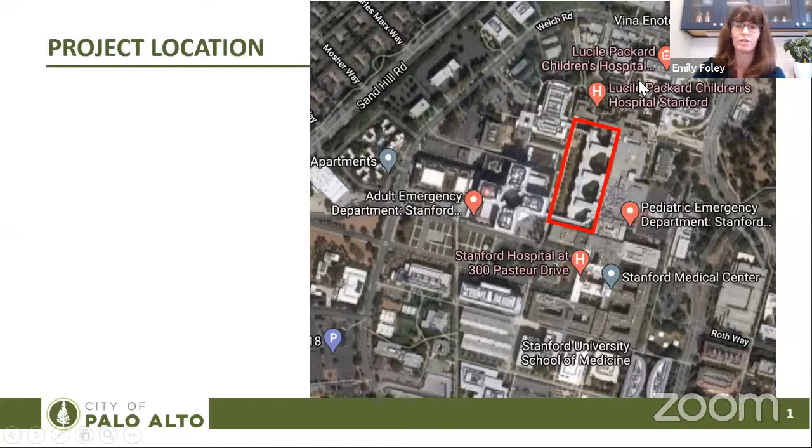As a general overview of the Stanford University Medical Center project, in 2011 the overall renewal and expansion project was approved. This included the Stanford Hospital built over the last couple of years, which has been more or less completed, the expansion of the Children's Hospital, new School of Medicine buildings, one of which has been built, updates to the Hoover Pavilion site north of the main site, as well as new parking facilities and road improvements. A current application also being reviewed is for a road extension that was part of the original project entitlement.

The project we are looking at today is not part of this original entitlement, which is why it is an architectural review board level project. In terms of the overall site, there's 3.6 million square feet of building allowed, and this project would require the site to temporarily be over this. However, this is allowed under the CUP. It would start a 3-year conditional period to reconcile the floor area between the newly built area and parts that are proposed to be demolished as part of the original entitlement project.

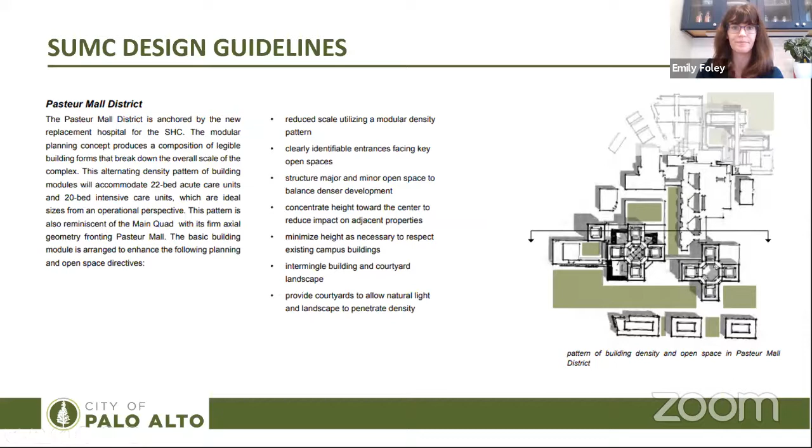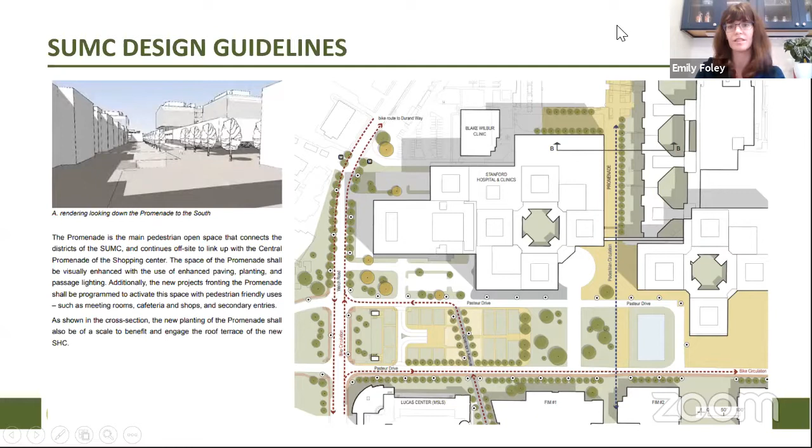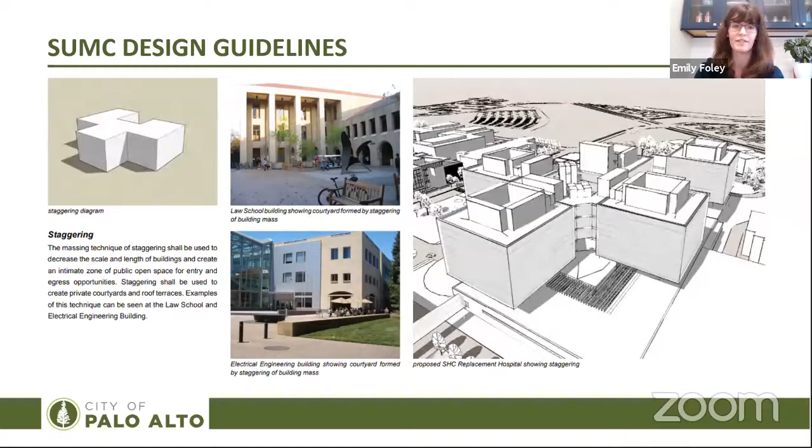Staggering is also an important massing technique in the guidelines, to have the buildings offset and have the in-between areas used for landscaping and open space.

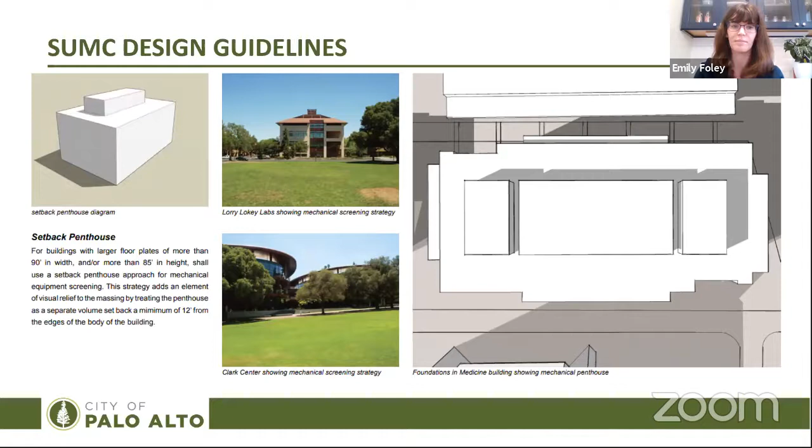Another technique is to have equipment penthouses set back from the edge of the building to reduce visibility.

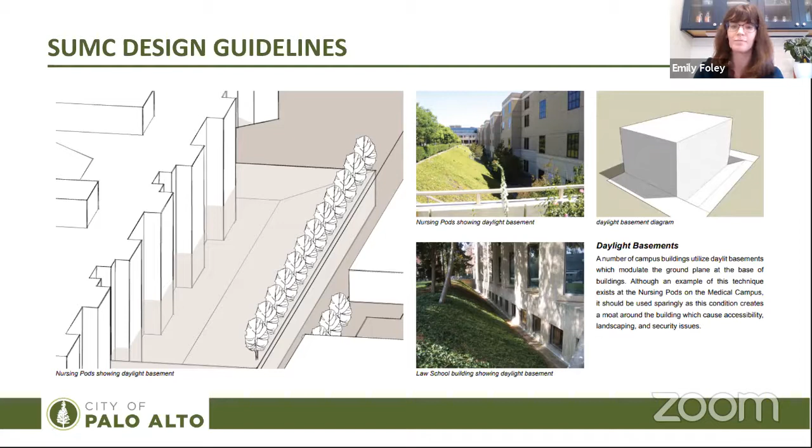This guideline also talks a little bit more about the importance of courtyard and in-between landscape areas.

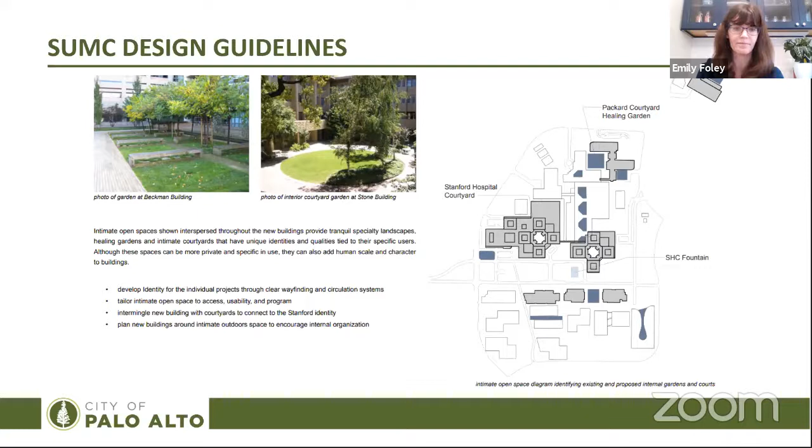The design guidelines also include a palette of materials and colors. One important aspect of this is dividing the materials of a building into primary, secondary, and accent categories.

However, there are many buildings throughout the medical campus, and while they need to work together, they are not necessarily all the same materials and colors.

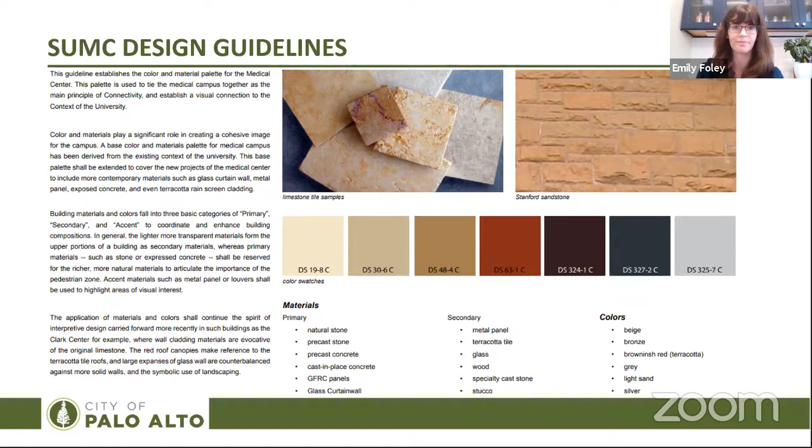Looking at the nursing pod expansion project, the proposal is to add 38,000 square feet to the existing 134,029 square foot building. This new addition would have a 71 bed capacity, which includes some new beds under the total 600 bed limit for the hospital, as well as relocating some beds from older portions of the hospital.

The proposed height is 4 stories, which matches the existing nursing pod building, and one of these is the below grade daylight basement level.

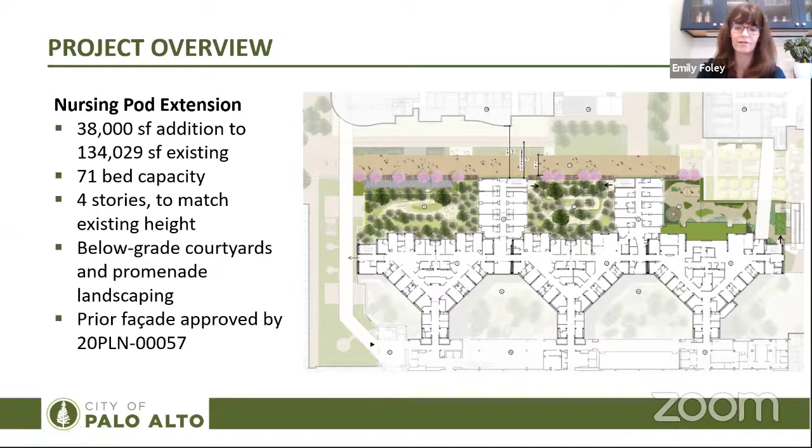There's below grade courtyards, and that would be modified as a part of this project, as well as landscaping modifications to the promenade. The exterior of the building would be matching facade changes that were approved in a staff level architectural review for the main nursing pod building last year. However, work on this project has not started yet.

The top image shows what the existing nursing pod building elevation looks like, and the below shows the additions that will protrude to the front towards the promenade, as well as the facade change that was previously approved.

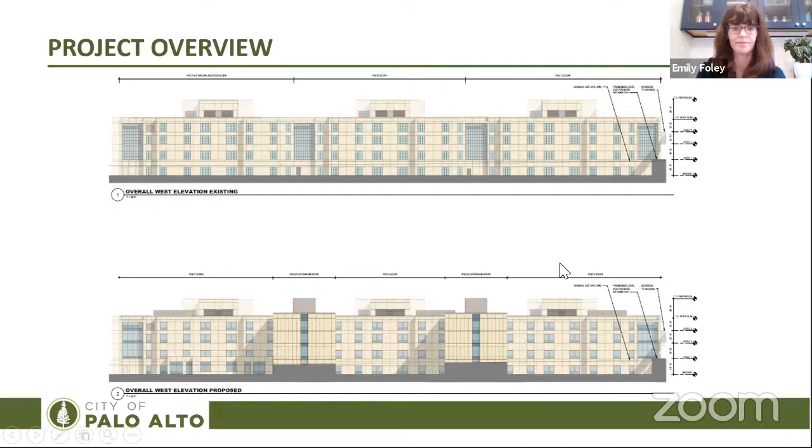This shows side elevations, as well as the promenade between the nursing pod building and the main Stanford Hospital building, which is this side.

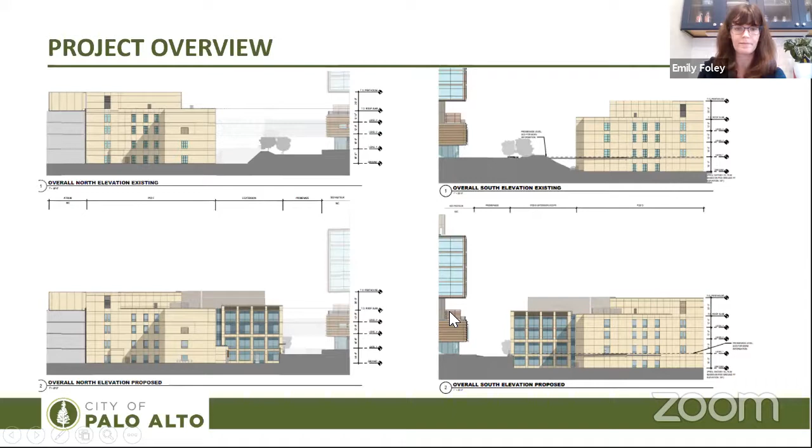This image shows the 3 courtyards. Currently, there is no access from the promenade to the courtyards. This design would add gates and paths for maintenance in the 2 courtyards on this side.

The 3rd courtyard to the right is more unique. It would have recreational facilities for the psychiatric ward of the hospital, and there are certain requirements that go along with that.

Overall, the particular plantings would be looked at more so in the formal application phase.

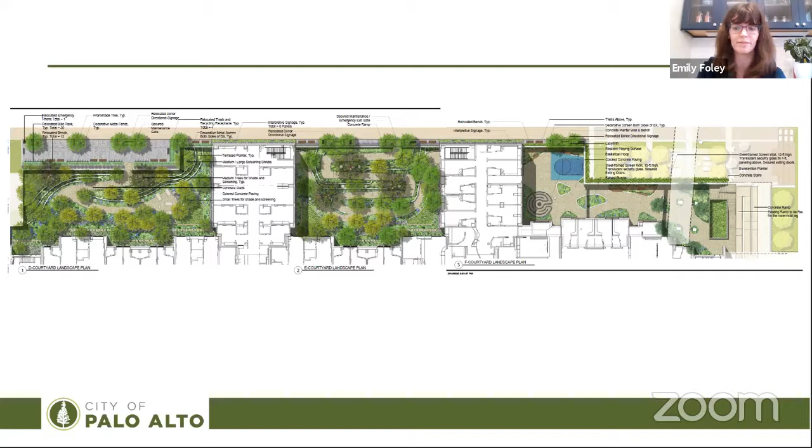The key input that we're looking for from the ARB today is on the overall size, form, massing, and scale; the integration along the promenade and throughout the site; the materials; the design of the gathering spaces, including the promenade and the courtyard; and the overall access, as well as the height and character of the proposed fencing and elements along the promenade. This concludes my presentation, and the applicant has a presentation as well.

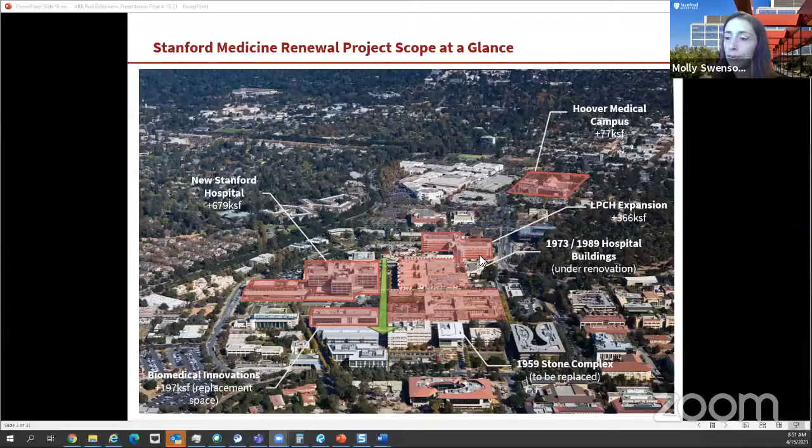Now zooming in and looking at the Promenade and our proposed project in more detail, the two extensions to the nursing pods shown here would add a total of 58 net new inpatient beds, which would enable the relocation of the remaining beds from the 1959 facilities, all within a minimal building footprint.

As this proposal was developed, we relied on the medical center design guidelines approved by the ARB in 2011 to guide our decision-making. With the project's proximity to the Promenade, we felt that this presented an opportunity to really think about the types of public spaces we were creating along this key thoroughfare, and to even allow it to become a destination in itself.

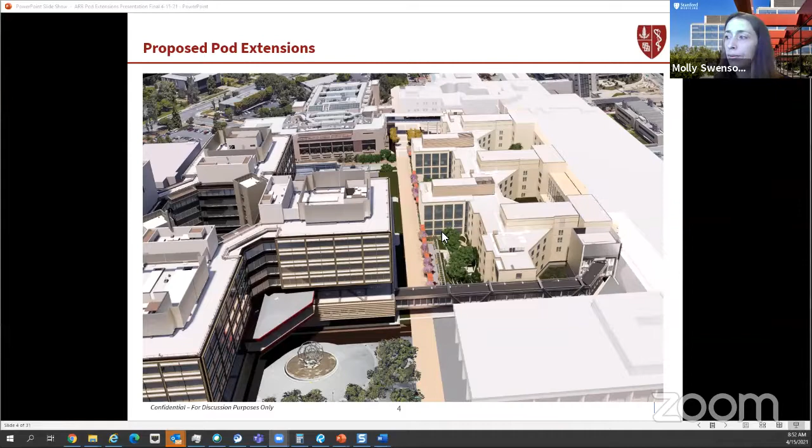Thinking about the levels of activity along the Promenade, it was our goal to build upon existing nodes of activity and really reinforce the nodes at either end of the Promenade, and allow the middle segment to become more of an opportunity for relaxation and respite.

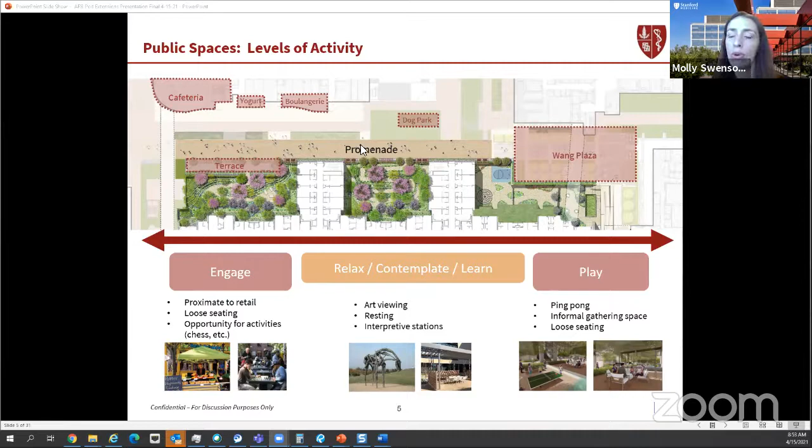With that in mind, our project would create a new outdoor seating area at the southern end of the Promenade, proximate to retail, food and beverage service at the adult hospital, as well as the adult hospital entry plaza. The middle segment would offer amenities geared toward more quiet activity.

Thinking about some of the specific programming opportunities for the terrace area at the southern end of the Promenade, some of the possibilities we're considering include health screenings, farmers markets, temporary interactive art installations, healthy cooking demonstrations, just to name a few. Then for the middle segment of the Promenade, we're planning for interpretive panels that would speak to the history of Stanford medicine and offer an educational opportunity as one walks along.

We're also planning for bench seating amongst plantings and beneath trellises, giving an opportunity for quiet contemplation. And finally, at the northern end of the Promenade, in the space known as Wang Plaza, as part of a separate scope, we're planning for ping pong tables and eventually a mobile library cart.

With this background context, I'd now like to hand it over to Pam Kurz with Perkins Eastman, who can speak to the building design. Thanks, Molly. I'm Pam Kurz, principal at Perkins Eastman, and lead on this design effort.

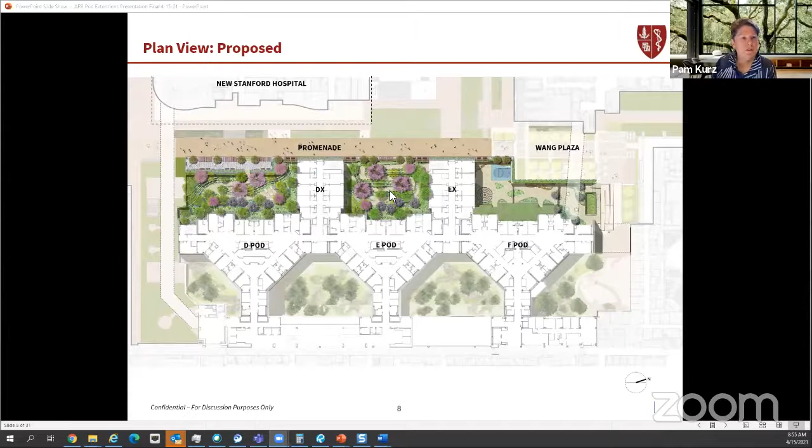Turning to our proposed plan, for orientation purposes, north is roughly to the right. At the top, we have the new adult hospital, the Promenade, the bridge connection to the pre-existing hospital, the 1989 nursing pods known as D, E, and F pods, the proposed extensions DX and EX, two view gardens, and a courtyard for psychiatric inpatients.

Looking at the west elevation, you see that the massing follows the staggering technique identified in the medical center design guidelines. We took special care to make sure there wasn't an alignment with the extensions and the new adult hospital, and the scale is in keeping with the existing hospital buildings.

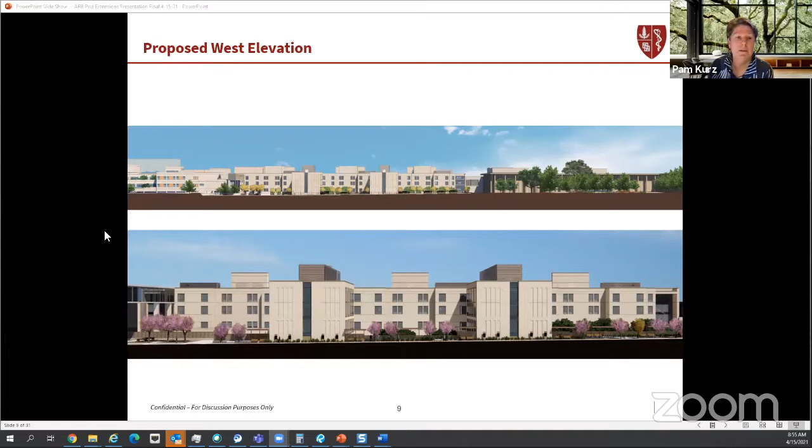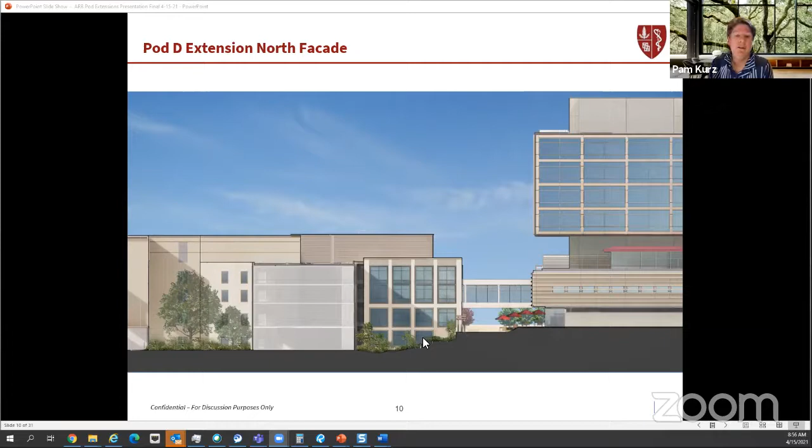Here you can see the relationship to the new adult hospital with similar window module and articulation, but scaled down to the pods. The north and south facades are both glazed, providing a connection for patients and families to the garden spaces. The view gardens terrace down one level from the promenade.

In terms of material selection, we have again taken direction from the medical center design guidelines, including a neutral beige color palette for the high performance concrete panels and replacement stucco at the existing pods. Shadow boxes at the patient windows use horizontal fritted glass, drawing on the language of the window baffles at the new adult hospital, but appropriately scaled down.

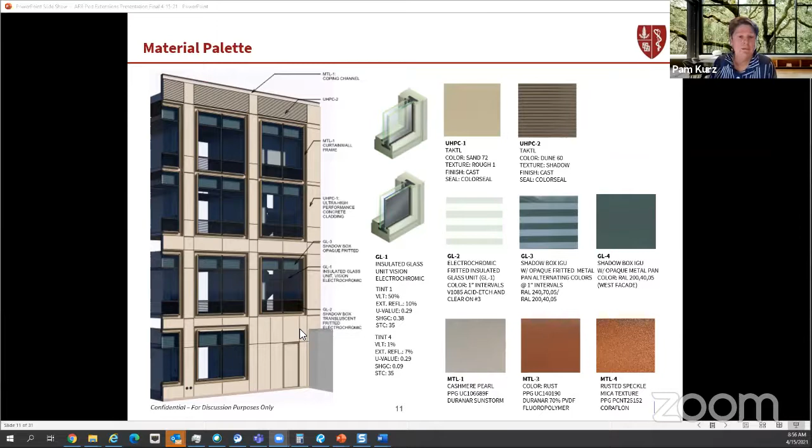Our design effort has given great focus to the promenade at the pedestrian level, where the pods and extensions serve as a backdrop. Simple canted TAKTL panels provide subtle visual interest with shifting shadow lines throughout the day, and trellises provide human scale. With that, we'll move on to views as experienced at the pedestrian level.

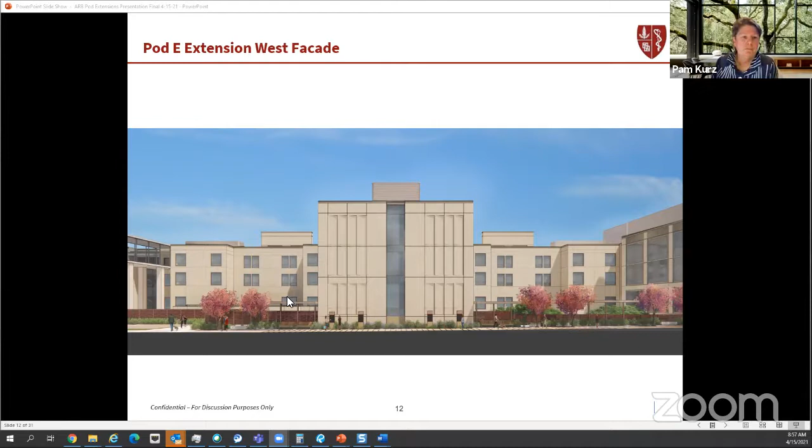A view from the southern end of the promenade, with the new terrace area on the right with loose seating. You can see the rhythm of the trees and trellis elements and large garden spaces between the new extensions. The trellises pick up the accent color used in the soffits at the new adult hospital, reinforce the pedestrian focus, and reduce perceived building mass.

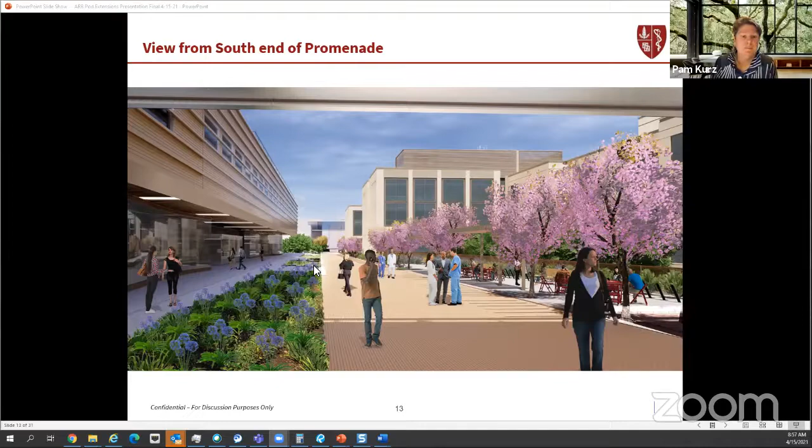I'd now like to turn it over to Adit Paul, who will provide more detail about the landscape design.

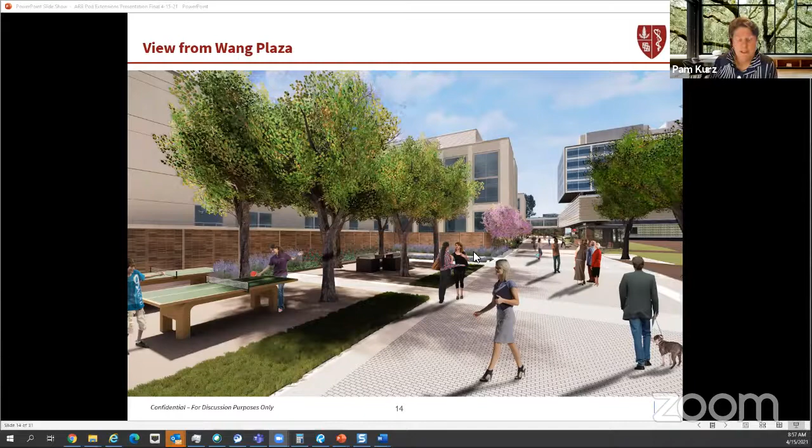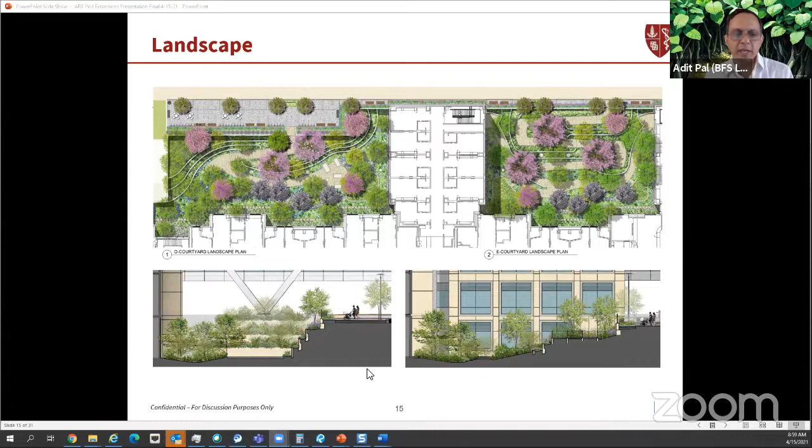The F courtyard is a carefully programmed outdoor space for psychiatric patients, approximately 4,500 square feet in area, with activity areas and garden plantings. This is actually a regulatory requirement for the psych facility that is being relocated from the main hospital.

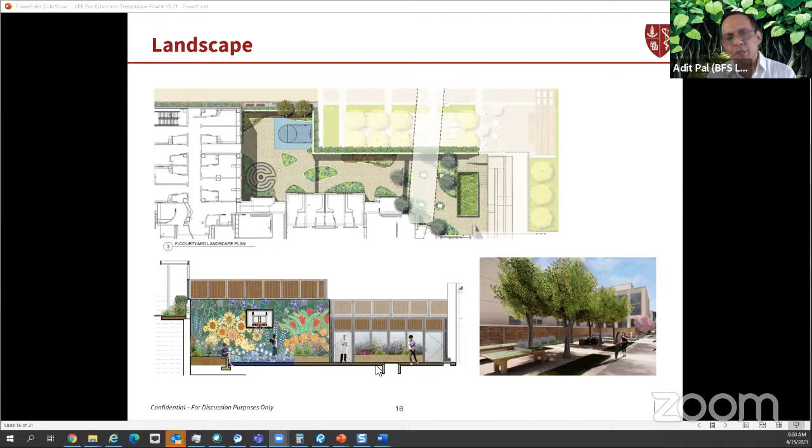The plantings at the D and E courtyards consist of a 2-layered approach. The layer closer to the windows will have heavily flowering garden plants that can be seen all around Palo Alto to bring comfort to patients.

And this is balanced by a textured yet seasonally flowering landscape back further in the middle of the courtyard. This large variety of flowering really supports the habitat creation goals of the city urban forestry master plan.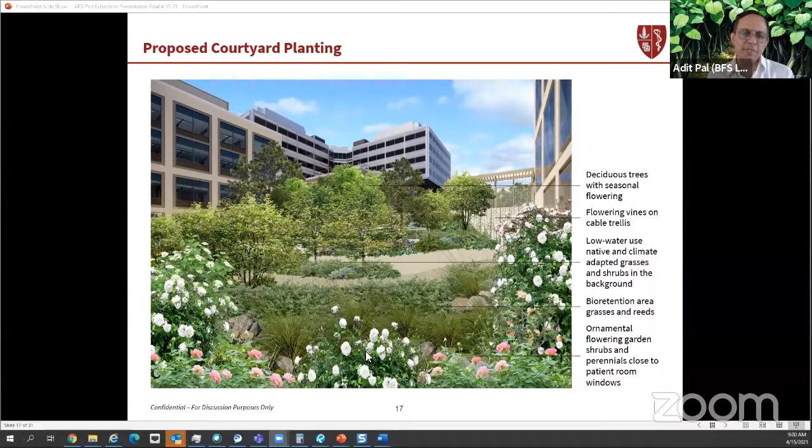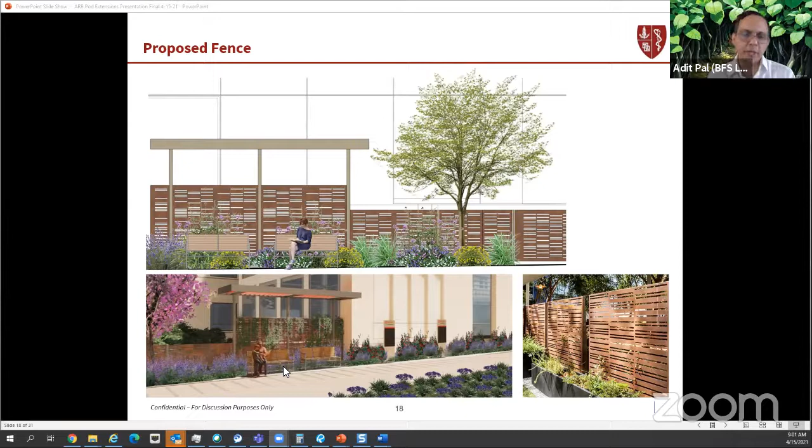The end walls that are kind of blank with the canted panels, I think still could probably use more work. I think I appreciate the effort for the interpretive panels and the canted panels. I think that helps. But I think maybe there may be ways to make it even more pedestrian friendly.

On the materials, I think that those are all acceptable. I think we've only had one other project in Palo Alto propose the tactile panels before, and it hasn't been built yet. I think it's still under construction. But I think that from what I've seen, it really has more depth than any other option on the market.

So I think that those are acceptable. I did look at the plant list, and I think that looks good. I do like the designs of the individual courtyards. I am not crazy about the fence on the north end, but I think I understand why it's there. I kind of like the idea of the slatted metal panels there, because in a way it kind of ties to the Edward Durell Stone panels, with the screens. So I think that's okay.

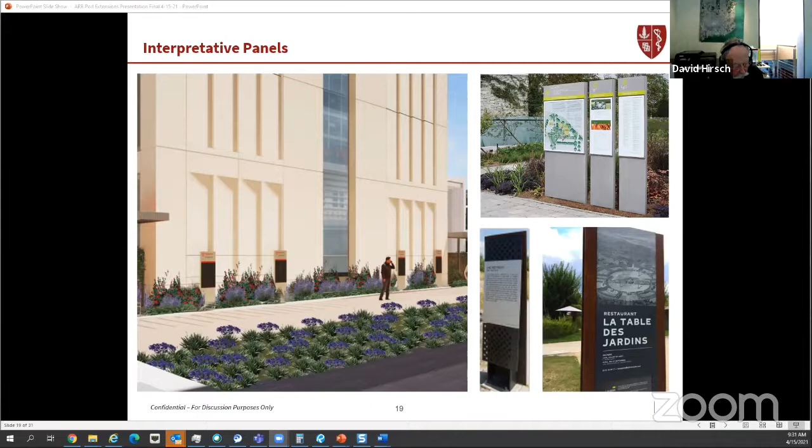So I think as part of the formal application, we'd be able to see a little bit more detail about the equipment going in there, correct? So we'd have a better understanding of why that height is needed. Right, and probably also a better understanding of what the screen itself is. Yes.

Any other comments from board members? Nope. And any other questions from the applicant on our review? No, thanks for all of your comments today. Thanks.

Sorry, I had one last comment on the panels. I think as you guys are developing these, panels have a tendency to look like junk on a facade when they're filled with a lot of information. What's really successful about a good information panel is how it brings out what's important. I know board member Hirsch liked the one above, which has a clean look with an evenness to the lines on the panels - that's something kind of successful. But I'd also encourage, and I think you guys are already starting this, that the coloring of what goes to the background and what comes to the front is key here. Maybe it could integrate art or something to create a bit more of a 3D feel than the 2D option. Okay, that's my note.

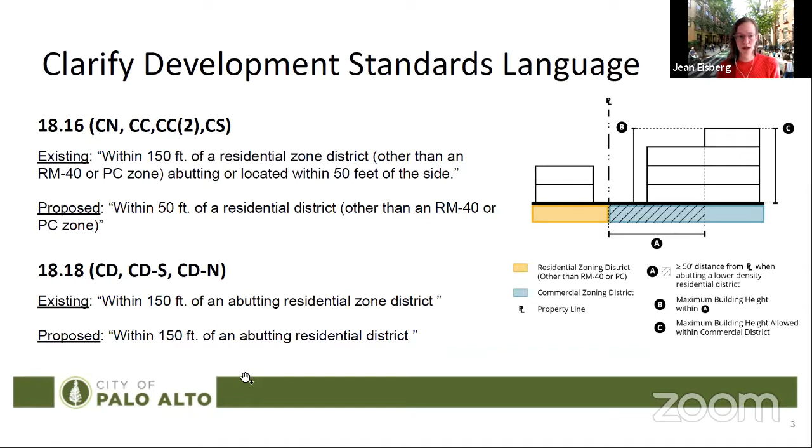In the At Places memo, there are text edits proposed as part of the Objective Standards project, where we were working with you on design standards. We also, as you recall, have another series of changes to other parts of Title 18, and this is the language proposed as part of those other changes.

So this looks a little less scary as a table. It's just generally more consistent across each of the districts. But again, we're not trying to make substantive changes at this time.

So the performance standards, when you're within 150 feet of these lower density districts, apply relating to visual screening, noise, parking, glare from potential lighting, air quality, hazardous materials, etc.

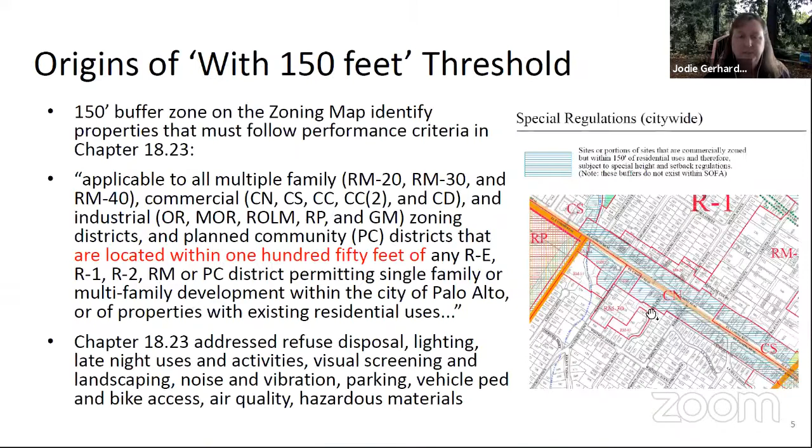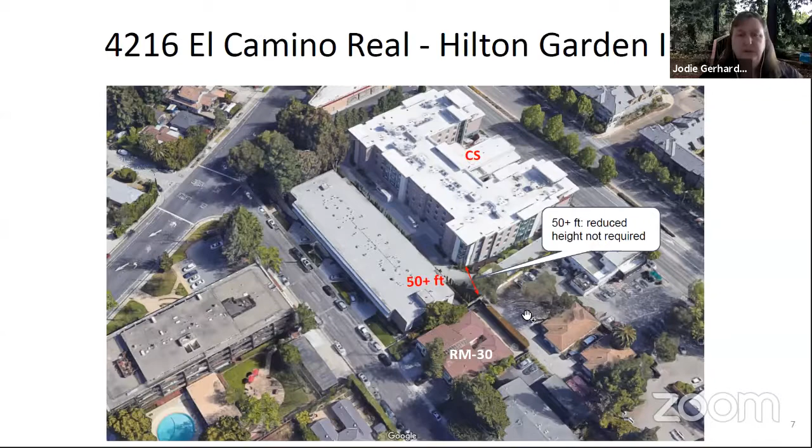Maybe Jean, if you show that slide back, the graphic for the measurement. Thank you. Wilton Court—that looks like it's going to the building, but I see now it's going to a fence, which is probably on top of the property line. Yeah, and you can see it on Wilton Court as well—it's from the RM30 property line to the Wilton Court building.

Okay, if you stay on the slide, can I ask one more question? Sorry I'm taking so much time. But if that wasn't RM30, it might have been 150, right? No, if it was downtown, it would have been 150. Right, so this situation downtown would have been 150 feet. Correct, currently. Okay, thank you.

Actually, Grace, on Wilton Court, this one is under the affordable housing overlay. Okay, so might that supersede? It has 50 feet, but if it were not affordable housing, it would be 150 feet. Okay, thank you.

So, the affordable housing, I'm sorry, workforce housing, has the same sort of confusing language as the commercial zones. Affordable housing does say within 50 feet, but it also gives the director a little bit of latitude. So this Wilton Court is actually like 46 feet, but it's sort of a good representation of what would happen in a standard commercial zone.

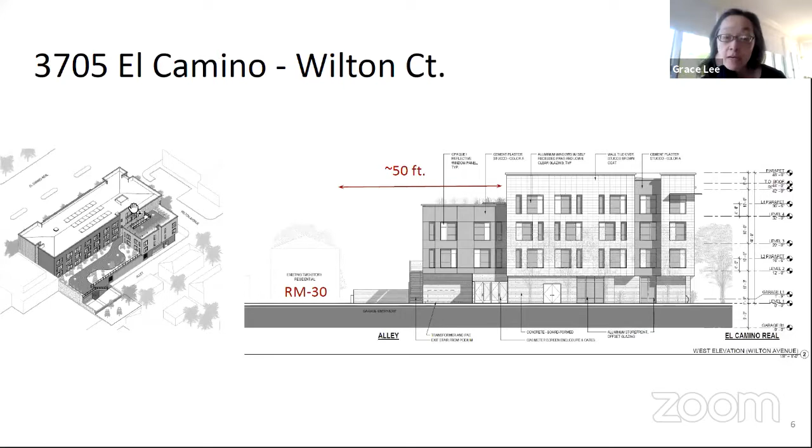Okay, and then I guess for Jean or for all of you, this is something when you say you want us to discuss these future housing discussions, this is something that will be posed to the housing element group, right? That was newly formed. I assume you're going to be bringing this exactly to them. That is correct.

Okay, well, should we go question by question, or maybe just the bigger topics? If we could start with just the objective standards project for today, the specific language, maybe we can do a round of that and then a round for the future discussion. Okay, sounds good, let's do that. Who'd like to start?

I'm happy to support what staff is doing. I think it makes a lot of sense to bring everything to the 50-foot distance as Jodie has done. So my answer to the first part is yes, I support that strongly.

Thanks. Board Member Hirsch? I agree with Mr. Baltay that the 50 feet seems very reasonable to me, especially looking at Wilton Court and seeing the way the massing is done. It seems an appropriate dimension, and the restriction involved there seems to be working very well with that particular planning and zoning, in that program, and should work in all others as well.

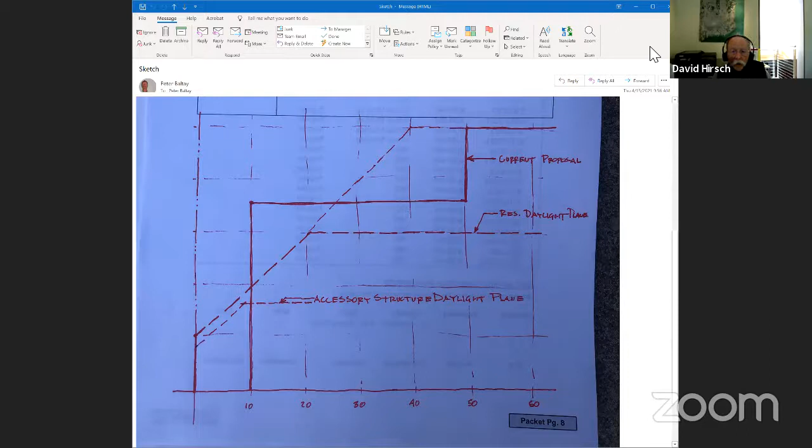I think this diagram really shows it to me. If it could be more a selection that cleans up this text - it seems to me the 50-foot works within this diagram, or to use the daylight plane, one or the other would be effective. So I would go along with the staff's recommendation here, but also I think a daylight plane would be equally successful.

Sorry, I was going to give Board Member Lew a chance. Oh, I'm sorry, okay, go ahead. Yeah.

Alex? Yeah, I don't think I have anything to say on the daylight plane, other than in many places we have the zero setback allowed. Like for example, in the CS zone, you can build right at the property line. And so that seems to be problematic in some cases.

And then I'm collecting my thoughts on the more general housing issue, so I'll come back later.

Okay, Board Member Baltay? Yeah, well, Alex is correct - you have zero setback in the CS zone, except when you're next to a residential property where you have 10 feet. And yeah, I'm starting to coalesce - there's only low density. Go ahead, Alex. That's not for - see, there's multifamily and then there's R1, and I think it only applies to the very lowest.

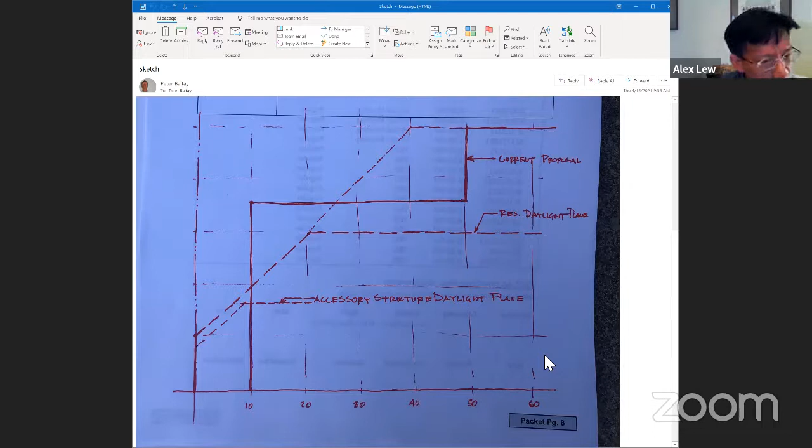Like R1, RMD. It's not been my experience, Alex. I'm working on a project downtown, we had 10-foot requirements point blank in the CC zone. But yeah, there's a 10-foot setback in the performance standards. There's a 10-foot rear setback abutting residential zones. This is for a mixed use or residential project in the commercial zones. And residential zones would be all the different residential zones up to RM40.

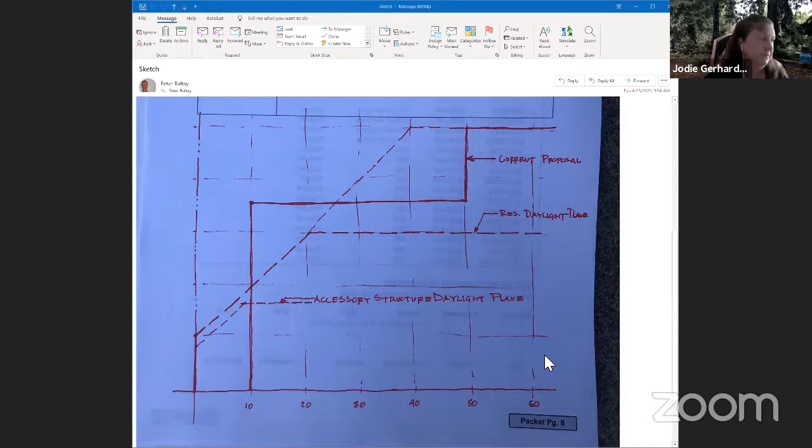Interesting, okay, thanks. But my thought is more that I think a combination of yard control, setbacks, and a daylight plane is probably a better, less restrictive way of achieving the same overriding objective, which is to preserve a sense of light and air and achieve more privacy.

Osma, to your point, I think if I were designing, I'd much prefer to have a daylight plane, which gives me a lot more flexibility to go a little bit higher if I step forward or backward. As a designer, I appreciate having the ability to decide for myself. Just being told 35 feet until I get 50 feet away is a pretty strong requirement. And I think a greater design flexibility, more subjectivity comes from a daylight plane. Never thought about it that much before, but I think that's how I feel that way anyway.

So I guess I'd like to, I don't know if recommend or anything, but it seems to me that a daylight plane is worth more consideration. Ultimately, Alex is correct - these are big issues that council, planning commission, and other boards and bodies need to think about. But if you want architectural advice, to me, this diagram says what I think.

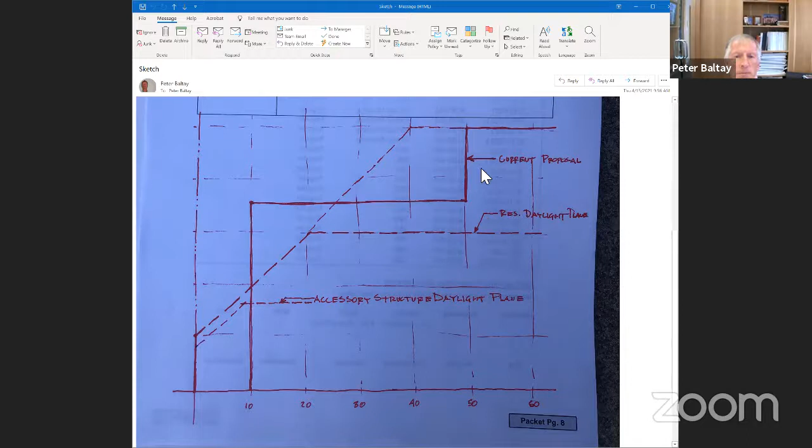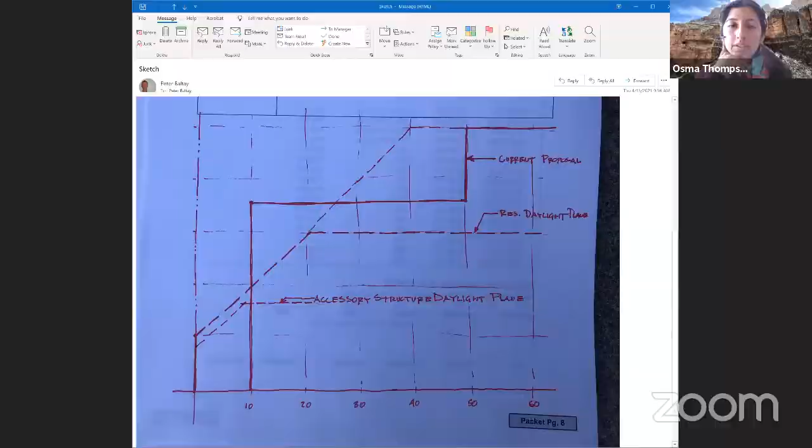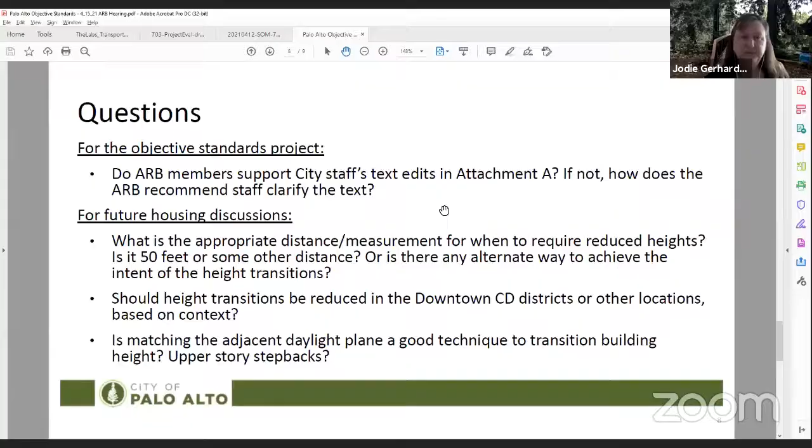Okay, thanks. Why don't we go back to the questions on the greater discussion? If you're able to stop share. Jean, are you able to bring that up? I just want to give the board a chance to discuss some of these questions here on the appropriate distance and the height transitions in downtown. So I think I heard that Vice Chair Lee and Board Member Lew were wanting to speak to these. So we'll start with Vice Chair Lee.

Thank you, Osma and staff, for posing the questions. I had a couple of thoughts, and I also wanted to engage Alex on the question, since I think Alex had mentioned some specific districts within Palo Alto and more of a gradual or layered way of looking at this for a future housing discussion. I wanted to pick that up to understand it better.

For me, when I look at these three questions, I think they're very important to ask. Largely, my impression from working on architectural review is that I generally question the height transition requirements where a proposal might not be fulfilling the exact standard in the table, but still seems to balance needs and provide compatibility and desirability.

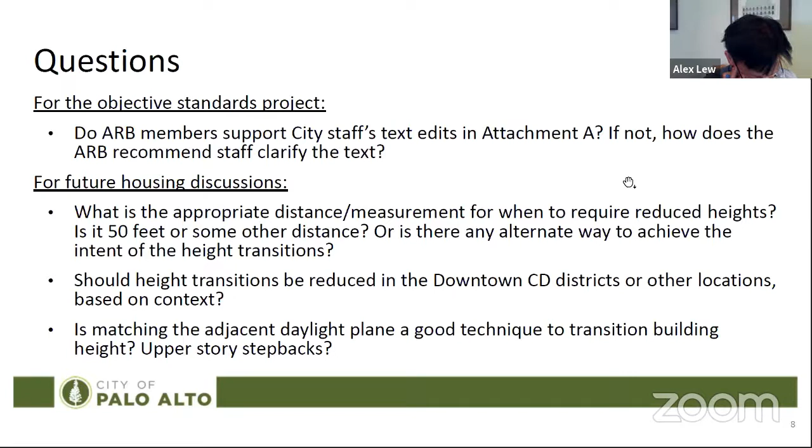On an alley off of Bryant Street, and it's historic. And because it's there, the zoning map draws a 150 feet circle all around it. So it's basically down-zoning like half of the city block for one historic house. Something like that really should bear some scrutiny. There must be a way to allow a historic house to have some sun without impacting half of the city block. So I think we should consider reducing it in the downtown area. That's it.

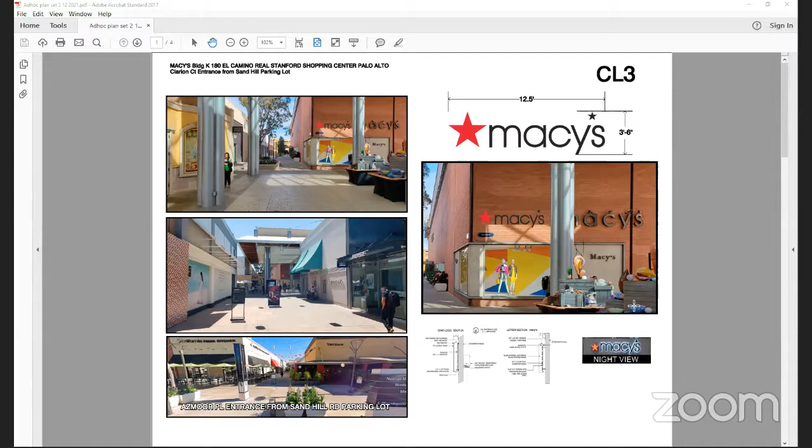So thank you to the ad hoc committee, still getting used to saying that after so many years being trained the other way, but times have changed. I'm Sam Gutierrez, the project planner that previously presented the Macy's signage exemption to the board, and of course we had some comments and conditions to bring back to the ad hoc group here.

It wasn't really about the signage size itself, it's more about location. So here looking at the plans, we could see that there was an adjustment because there were comments about adjusting the lines and the breaks from the previous proposal. Here we could see that the signage was adjusted to be kind of left justified, you can see it down the walkway. The other sign runs along that face of the interior of the shopping center for this Macy's building, further down towards what we call the Market Plaza area, towards Pacific Catch and Sand Hill parking lot.

Here we could see again the signage justified on different sides, but as pointed out during the previous hearing, there's been a number of trees placed there, so it makes it difficult to see, though these signs were brought to level, which was a requirement of the ARB. And then here you could actually see the sign without being blocked by the trees on the walkway.

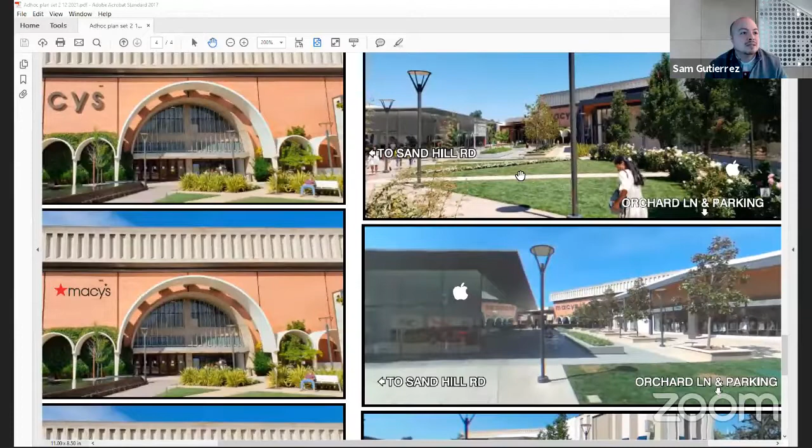There were questions about left or right justified placement, shown here in these perspective pictures. You can see the different perspectives from different sides. This top perspective is from the parking garage, looking toward the Neiman Marcus side, toward Quarry, with Orchard Lane and the parking lot here, and Sand Hill this way.

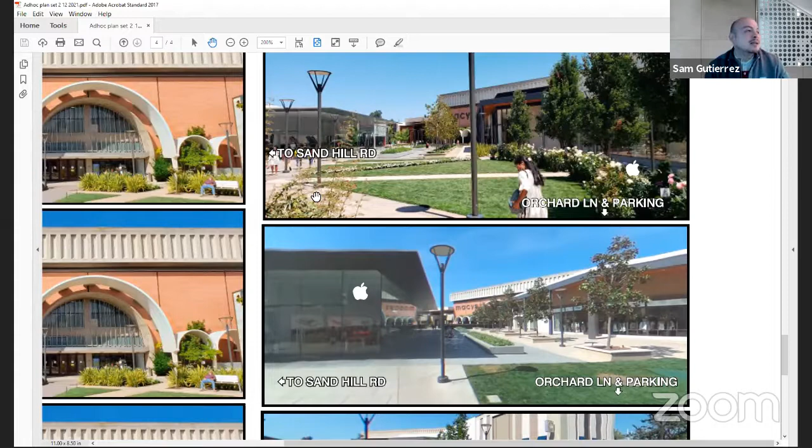Similarly, here's what it looks like coming from the Sand Hill parking lot, going between the buildings and Neiman Marcus, entering this plaza area, you'll see the existing Macy's signage. From this perspective you could see it in either panel, but not in an arch.

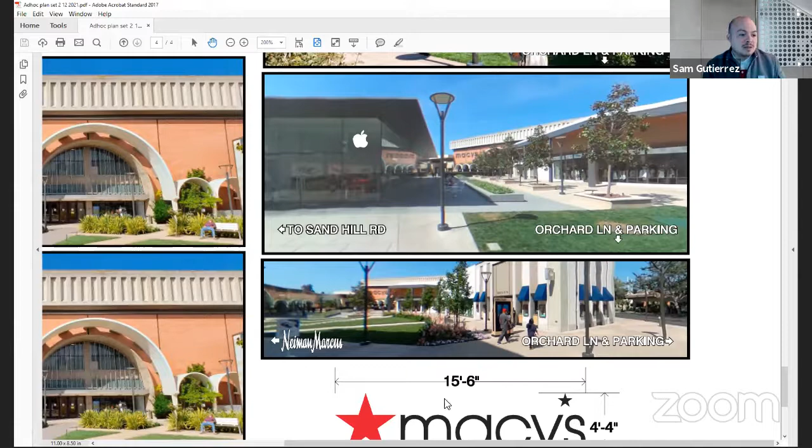Here's another perspective, from the Neiman Marcus side, where your view of the arch is blocked, but you could still see the original Macy's signage. So the question before the ad hoc group is what positioning is sufficient or more appropriate. I'll leave it to you, gentlemen.

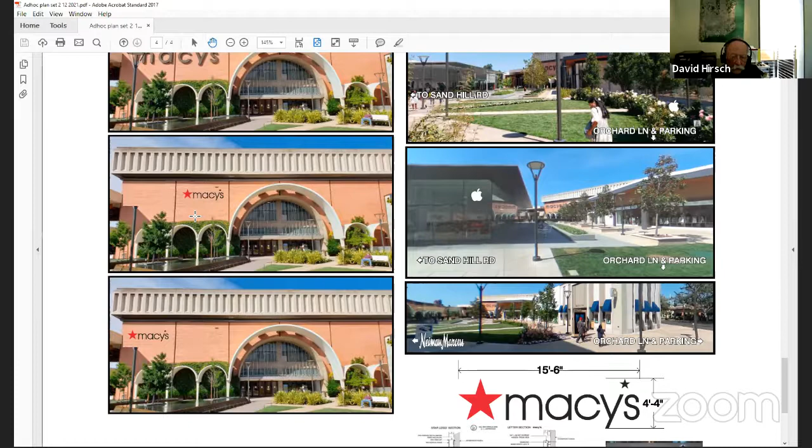Who goes first? I'm trying to figure out what we're being asked exactly. The location on CL5, the location of the Macy's. There are two options. Oh, I see. Left, yeah. And what does the applicant propose? Well, they're leaving it up to us, I think. Yes, correct.

My preference is the one on the corner, closest to the corner. Well, I agree with you. That's what I would choose were I the designer. I think either one meets the standards we're required to enforce. So for CL5, it would be left justified, this one here. Okay, you're happy with that? I'm happy with that, yeah.

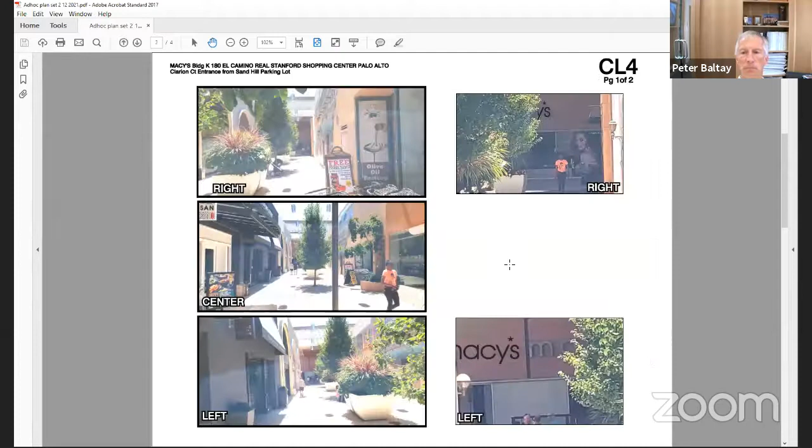And then about CL4? The next one. There we go. So this would be right justified on this panel and left justified here. Again, this would be the different views from the walkway heading towards the center of the shopping center.

Well, I prefer the one on the right side of the vertical strip, that one. Right here. Okay, that's fine with me. Both of them are fine, I think.

What was our original concern, Sam, with this? One concern was that the CL4 and CL3 weren't aligned. If you were walking down that walkway, you'd see them a little uneven, so this has been brought to an even stance. And there was concern about location, because before, the Macy's signage was proposed with some letters in between the breaks.

The M and the A were in the break. In CL3 it mirrored what the original signage was doing, where this break in the brick facade, which is actually pretty thick, about 4 or 5 inches, was breaking up the copy of the sign. It just didn't look correct architecturally, so that's where this repositioning came about.

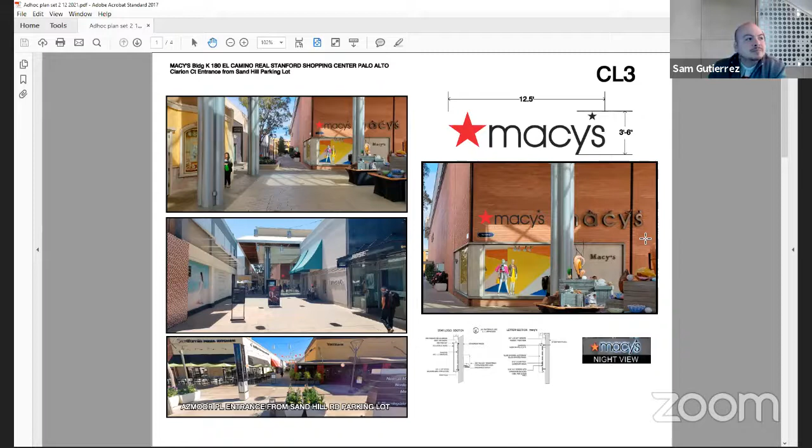Okay, so now both signs are aligned vertically, is that right? Yeah, equal distance off the pavement. Okay, well this one, the CL3 being to the left, looks good, and the one where David just suggested in the CL4 right panel, I think looks better.

If that's what we're being asked, that's fine. Yeah, the applicant - those three. Is that it? Yeah, that was really it. Pretty simple and straightforward. Thanks for putting it all together.

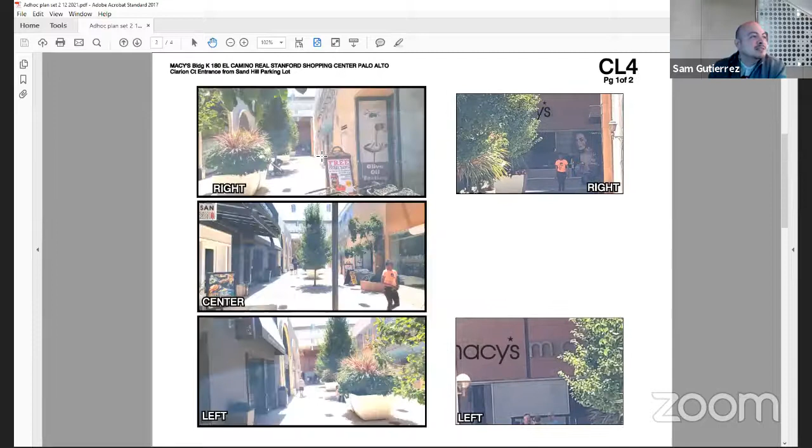Okay, sounds like we're good, just to make it clear: this looks fine, CL3 does the adjustment, CL4 we're going for the top option here, center panel, and CL5 we're going for this bottom option where you're on the far left panel in the corner.